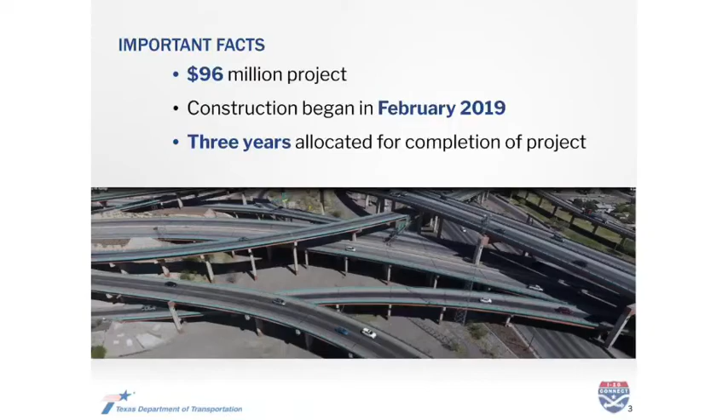There are also changes coming to the Paisano Drive and Interstate 110 intersection. We'll take a look at those in depth later in the presentation, but next we wanted to show you an animated fly-through of the way the project will look when all is said and done.

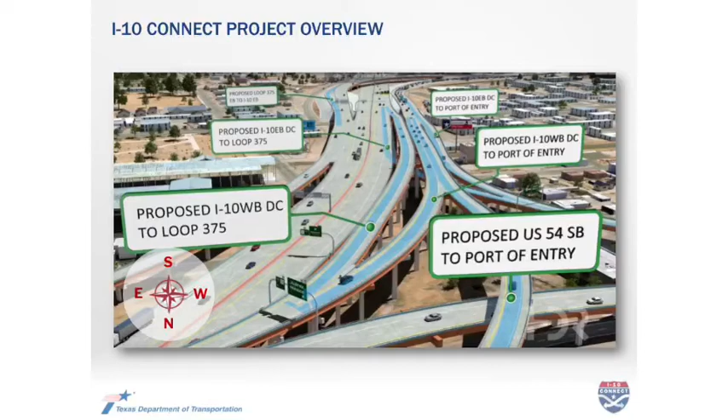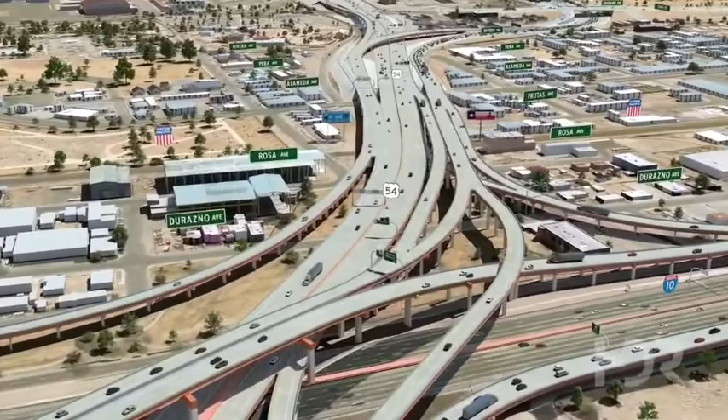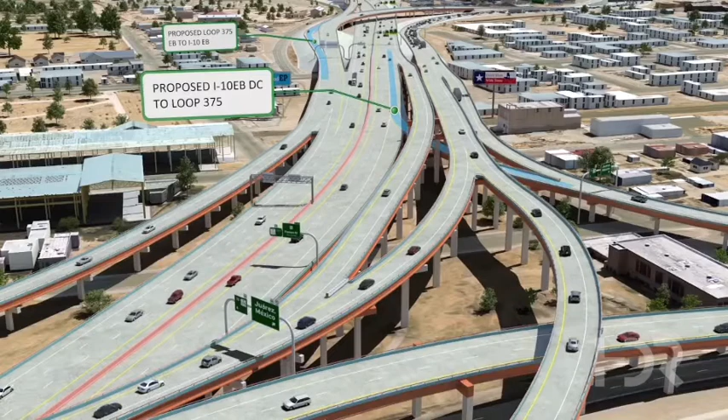Again, this is an animated version of what the project will look like when it is completed, when all is said and done. You'll notice it looks a lot like the still image we showed you earlier. Again, anything you see in blue is a new ramp being added or replaced as part of this project. I'll let the video speak for itself for a moment and come back in just a moment.

Now pay close attention to this area here, the I-110 and Paisano area. We're going to talk a little bit more about the changes you'll see there later on. It may not look like a lot right now, but when we dig into it, you'll see some pretty radical changes coming to that area.

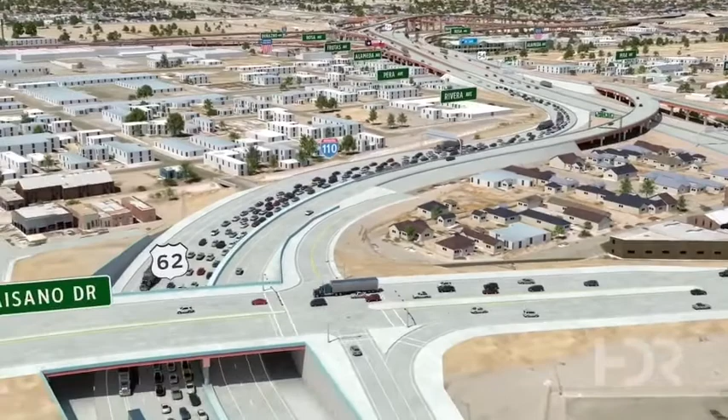All right, so now we're flying over the Bridge of the Americas, looking back towards the Spaghetti Bowl interchange.

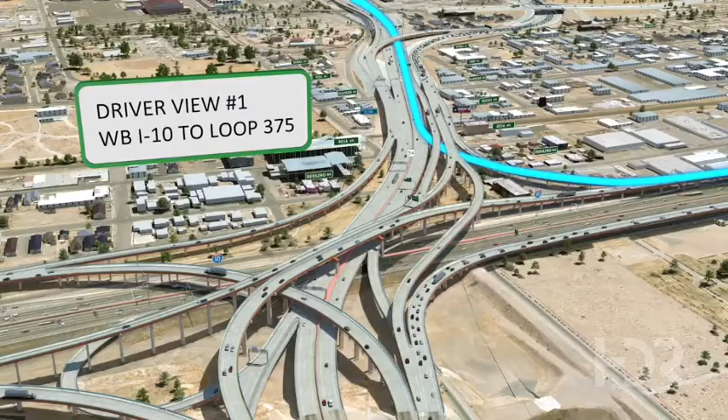So now we're going to do a driver's eye view. Let's say we're leaving downtown, trying to get over to Loop 375 to use that as an alternate. Again, that's something that right now is really difficult to do in the current configuration. There's no direct way to get there. In fact, you have to go through several traffic lights.

But this animation shows that when this project is complete, there will be direct access from I-10 to Loop 375 there at the Spaghetti Bowl. Right now, the only ways you can directly get on I-10 or from I-10 to Loop 375 is, for example, near the Sunland Park Mall area, also at I-10 and Americas.

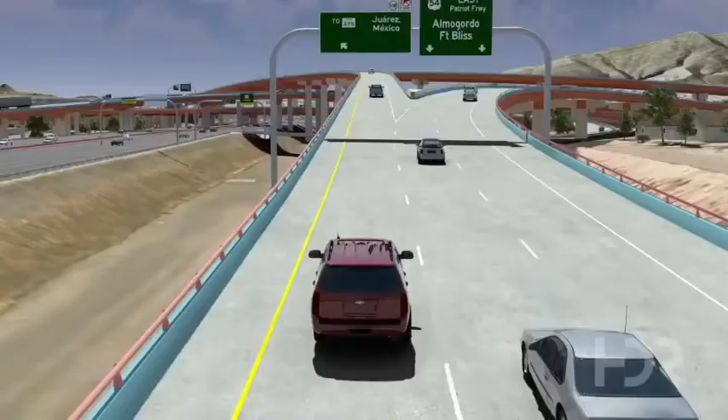Here's another driver's eye view showing the difference in when you will make that decision, going from, say, Cielo Vista Mall to the Bridge of the Americas. Right now, once you take the Juarez exit, you have a little bit of time to make a decision. Do I really want to go to Juarez? Do I really want to go to Paisano?

When this project is complete, whether you're coming I-10 West, I-10 East, or US 54 South, you'll make that decision about going to Juarez at the Spaghetti Bowl. Once you take those Juarez exits, there will be augmented signage, but once you decide to take the Juarez exit, you're heading to the Bridge of the Americas.

One thing you'll notice in this animation is a little bit of additional capacity for vehicles that may be waiting to go across the Bridge of the Americas into Juarez.

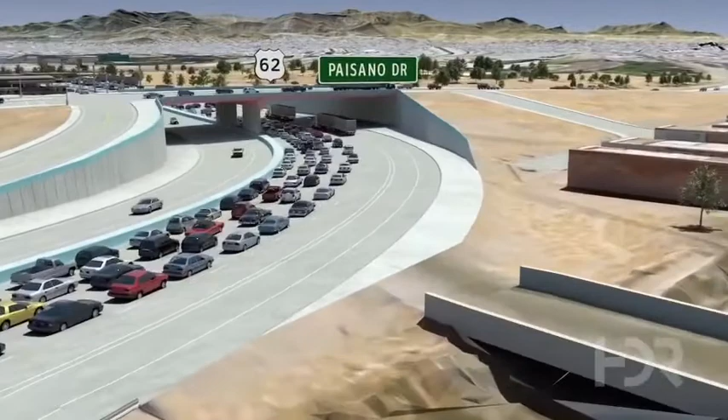So the animation we just showed you is about what this project will look like when it is all said and done. That's still many months from now, but we have one emergency closure we want to let you know about that is a few hours away.

We put this out via text message alert earlier today and on the I-10 Connect and Texas DOT social media platforms: an emergency closure tonight of ramp K.

That's the ramp that links southbound US 54 to westbound I-10. So going northeast El Paso towards downtown El Paso, that ramp will be closed later this evening to make sure crews can safely repair a bridge joint on that ramp.

That closure will be in place tonight, Wednesday night, and Thursday night. So if you're heading out and about, want to make sure you know that ramp from US 54 southbound to I-10 westbound at the Spaghetti Bowl will be completely closed overnight tonight.

Also right there at the Spaghetti Bowl, if you've driven I-10 lately, you've seen a lot of changes immediately to the west of US 54: a really high-flying direct connector ramp, about 75 to 80 feet above the driving surface on I-10. Probably one of the most visible components of this project being constructed.

That ramp will be the direct connector ramp from southbound US 54 to the Bridge of the Americas. We talked about how you'd be making that decision about going to Juarez sooner — that's the ramp you would take from US 54 to get to the Bridge of the Americas. Crews have been out there busy for several weeks actually placing some of the bridge deck panels. We have a video to show some of that work that's been taking place recently at night.

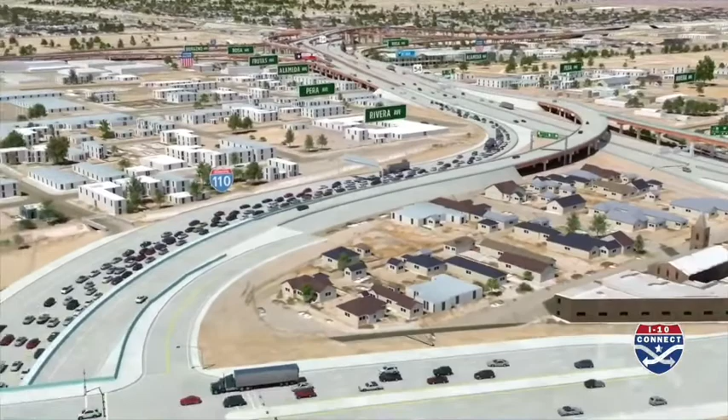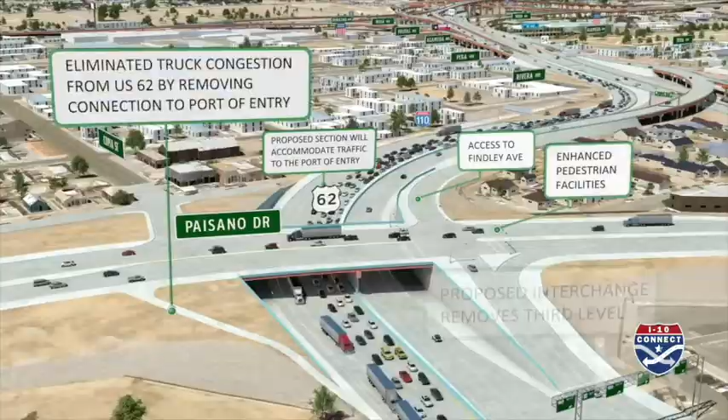We have a video from Jennifer explaining what those changes are that could be coming sooner rather than later. When the I-10 Connect project is complete, ramps from Paisano Drive to the Bridge of the Americas will be removed. This change will alleviate backups from the bridge onto Paisano near the Chamizal National Memorial and the El Paso Zoo. While the project is far from complete, some permanent changes will begin soon at the Paisano Drive I-110 interchange near the Bridge of the Americas.

Stevens Street will close permanently between the Franklin Canal and I-110. The mid-level of the interchange will close permanently too. That means no left turns and no through traffic will be permitted at any of these traffic lights. Right turns will be temporarily permitted, but eventually they'll be eliminated too.

The changes shown in purple will be permanent. Neither Stevens Street nor the highlighted ramps will reopen. Once the permanent closures are in place, access the Bridge of the Americas by following the marked Juarez detour via the Pershing turnaround, then take exit 20B to I-110 in Juarez.

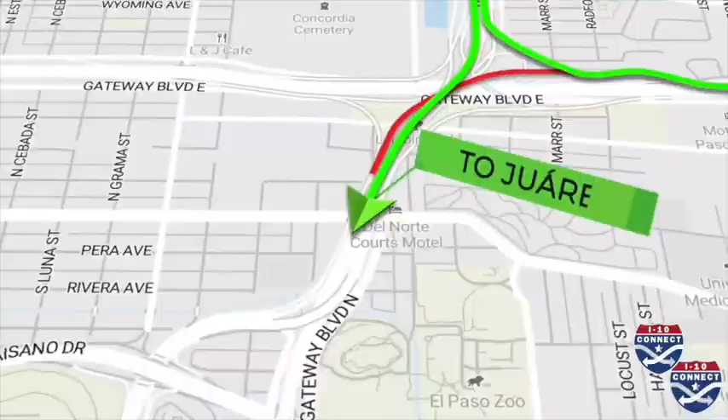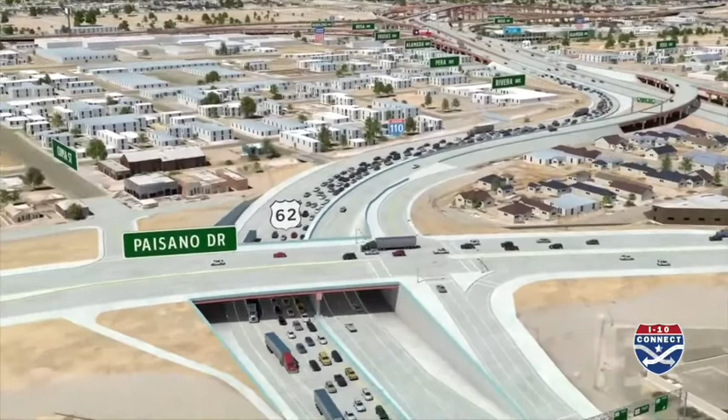All northbound traffic will temporarily be required to turn right on Paisano upon leaving the Bridge of the Americas. When the I-10 Connect project is complete, traffic leaving the bridge will be able to continue below the newly constructed and reconfigured interchange or access Paisano Drive. All southbound traffic will access the bridge via direct connector ramps at the Spaghetti Bowl.

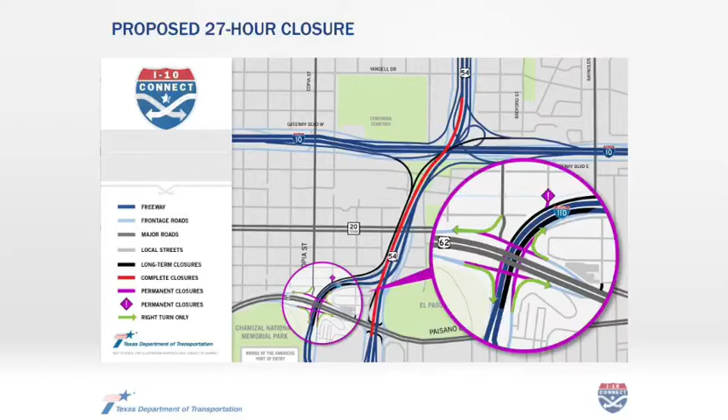On the next slide, we're going to zoom in a little closer to really put as fine a point as possible on what those permanent closures would look like. Again, the exact date they begin is still to be determined. When this project is complete, Stevens Street will be closed to all traffic permanently between the Franklin Canal and I-110. That's where you see that exclamation point. It's a really short bit of street, but it's very important.

We know a lot of people have not been taking the marked detour, but have found their own way to get to the Bridge of the Americas by coming down Copia, turning right on Rivera, and then connecting south to the Bridge of the Americas, or to I-110, on Stevens. That access will be permanently eliminated in the coming months.

So now is the time to really start building that habit. When this project is complete, all traffic for the bridge will take US 54 to I-110 to get there. Don't be caught off guard, don't wait till the last minute. That Copia to Rivera to Stevens shortcut will be going away, so follow the marked detours next time you head out.

A little bit further to the south, you see that mid-level shown in purple. That's all four of those traffic lights immediately north of the Bridge of the Americas. That area will be closed, so you won't be able to go straight through the intersections or turn left. When all is said and done, that entire middle level will be closed and removed as part of construction. But in the near term, the first phase of closure will be no left turns, no through traffic. Those right turns shown in green will be allowed to continue during construction.

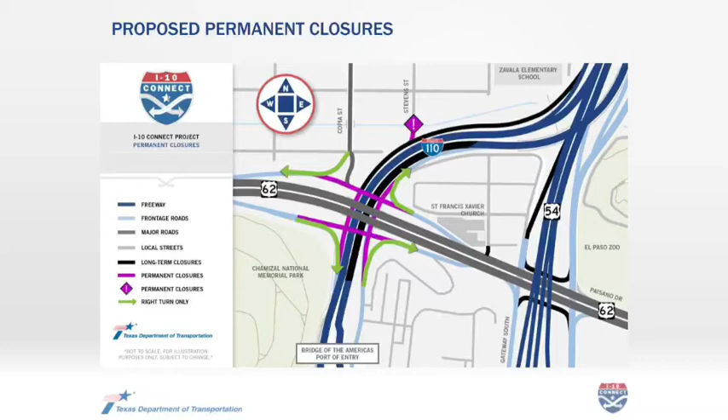Now, the permanent changes will begin before the permanent pieces and parts are in place, so to speak. So while there'll be demolition work and new construction yet to be done, the traffic patterns will start to more closely resemble what they will permanently look like in the coming weeks and months.

So let's talk about why these closures are needed, why these permanent closures are coming as part of this project. The primary goal is to provide a direct connection between I-10 and Loop 375, so you can use Border Highway as a better alternate to I-10. The project will also eliminate congestion along Paisano Drive near the Chamizal National Memorial and the El Paso Zoo, by removing those ramps from Paisano to the Bridge of the Americas.

So while many of us have for years taken Paisano to get to the Bridge of the Americas, in the coming weeks and months that will permanently be closed. All southbound traffic will reach the Bridge of the Americas via new direct connector ramps coming from the Spaghetti Bowl, from US 54. When the project is complete, you'll be able to go I-10 directly to the bridge. Right now, you have to go I-10, follow the marked Juarez detour, and then access Interstate 110 to get to the bridge.

But now is the time to begin thinking: don't use Copia to get to the bridge, don't use Paisano to get to the bridge. Here's what will remain in place. The lowest level of the interchange, which carries I-110 to and from the bridge, will remain. The middle level will be removed and replaced with a new overpass carrying US 62 east and westbound. So while we're going to see some significant permanent closures coming up soon, there will be other closures to follow in the coming weeks and months.

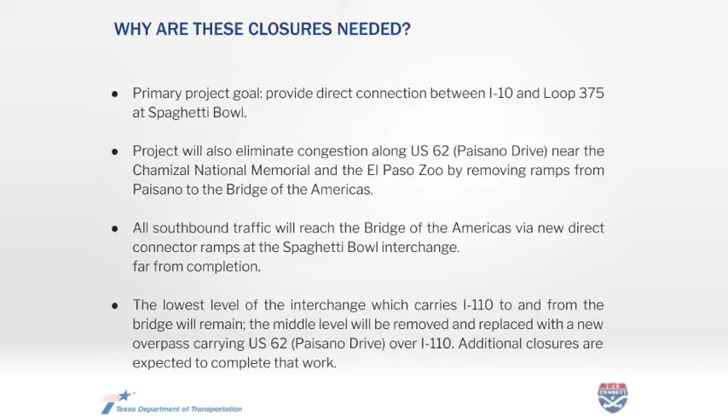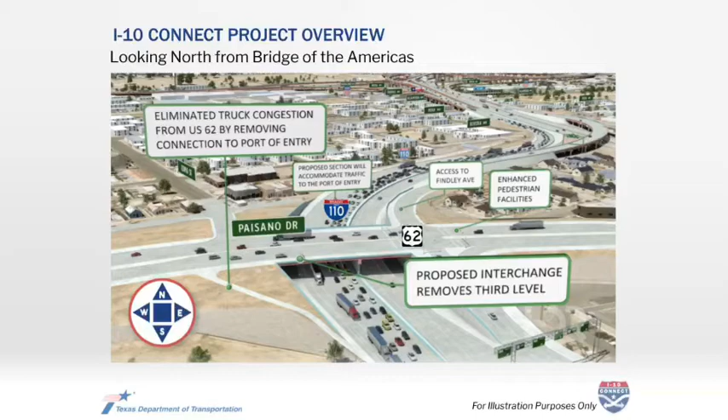Just to give you as fine a point as possible on what it will look like when it's done, here's a slide looking north from the Bridge of the Americas. You see I-110 allowed to remain north and south out of the bridge. Paisano Drive, east-west, going left to right across your screen, will remain. But what will not be there is the access from Paisano down to Interstate 110.

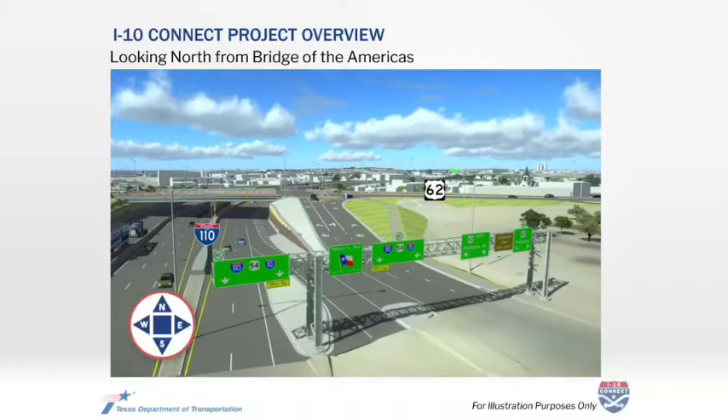Here's another 3D view looking north, away from the Bridge of the Americas. So you've just crossed back into El Paso from Juarez, near maybe the TABC facility there. You see not a great deal of changes to traffic coming out of the bridge, other than that you'll be able to continue south or continue north on I-110 away from the bridge. The only connection from the bridge to Paisano will be this one, right there in the center of your screen. Traffic will be allowed to turn left and right onto Paisano after the project is completed. But that's the only connection between Paisano and I-110 after this project is completed.

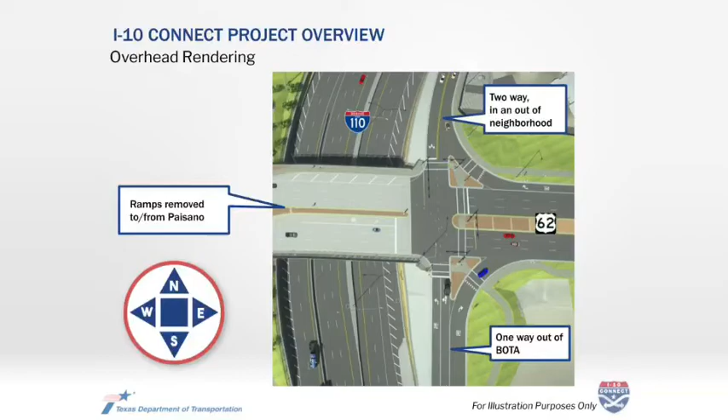And when those mid-level traffic lights close, they will not reopen.

So Jennifer, I'm sure that leaves lots of questions for folks, and of course, we're happy to answer them. That's right. Am I on?

Thank you. When this project was in its design phases, we had several public meetings, and it became apparent that there were issues in the neighborhoods with truck traffic, in the Chamizal neighborhood with truck traffic accessing 110 or the Bridge of the Americas from Paisano. There was poor air quality, and it caused additional backup on the I-110 because every time a car turned left and merged, it backed traffic up on the 110. So this was an important change that came about to the design of the project during our public meetings.

And it just shows you that TxDOT truly is responsive to the public input that we do receive at those public meetings. I would encourage everyone to attend public meetings when they get the chance, because this is where the sausage gets made. It's not always very fun, but it's good to be involved because real change can come about on this project.

So the important thing is that access is going away for multiple reasons, and everybody is going to have to get in line at the same time off of I-10, off of 54 in order to cross the bridge. I think it's going to really help with the backup there, separating out the traffic that's headed somewhere else so they don't get stuck in that type of traffic will also mean that there's more storage for the vehicles headed southbound. And while we cannot control the pace of traffic crossing the bridge into Mexico, we can at least make the wait fair and pleasant as can be.